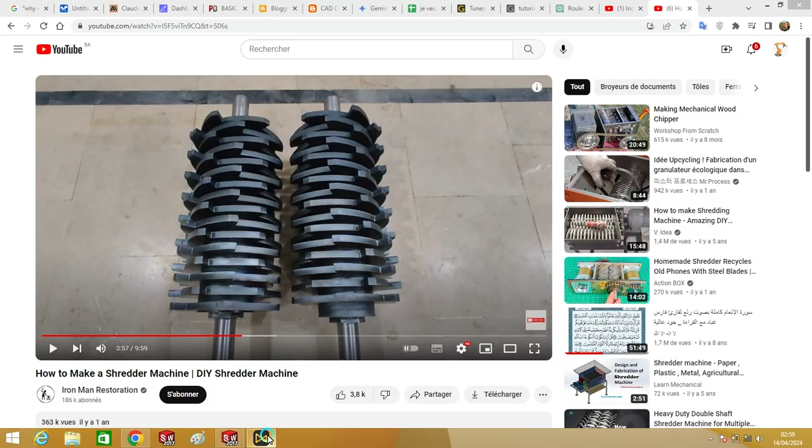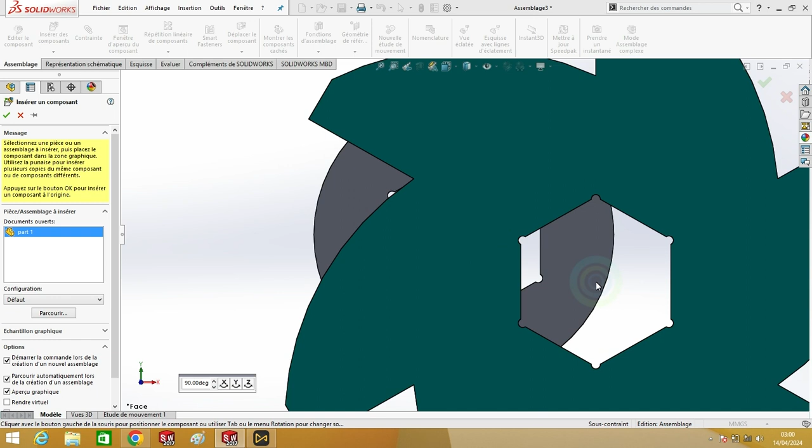Here we open a new assembly. We will take this one. It's the 15 mm spacer. Now we'll take one spacer, one cutter. First relation is contact. Okay. Now here, and here. Okay.

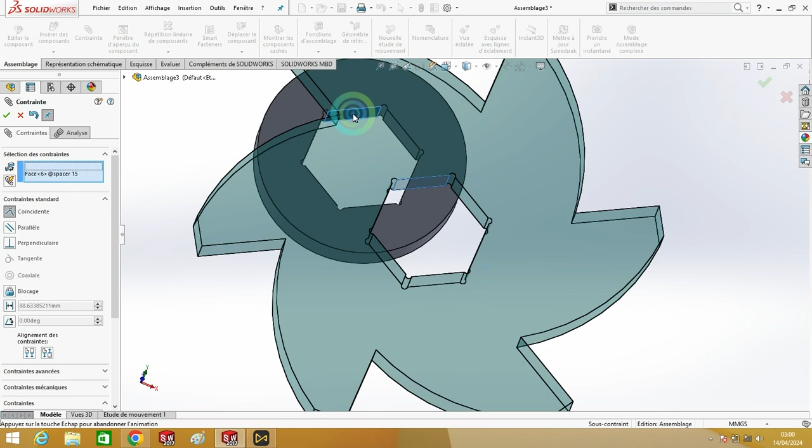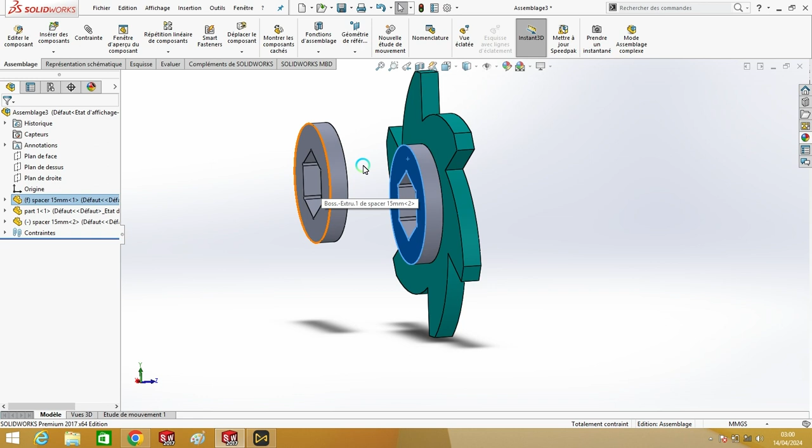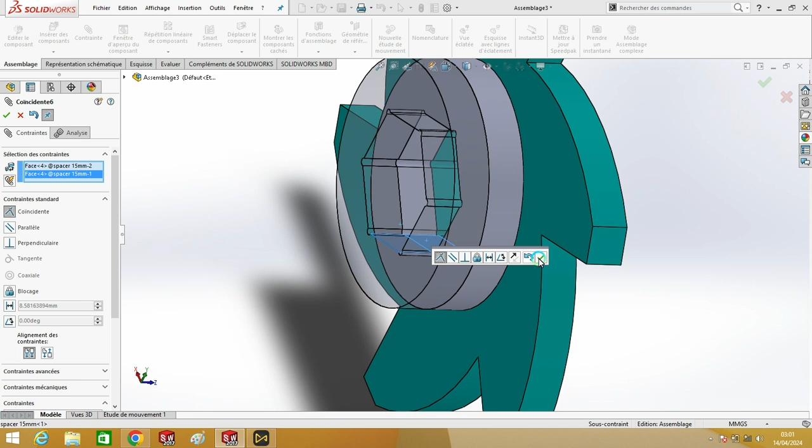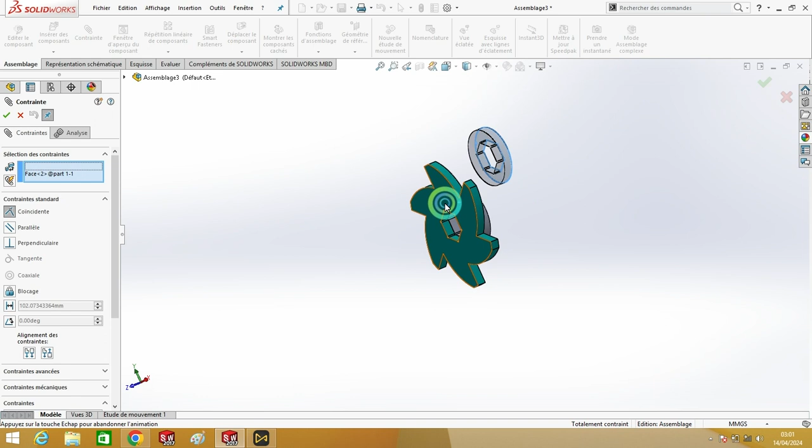No, sorry, we forgot. We'll put another spacer also. So let me make it here. Okay. It's okay now. Now we'll put another spacer. Here. Same as before.

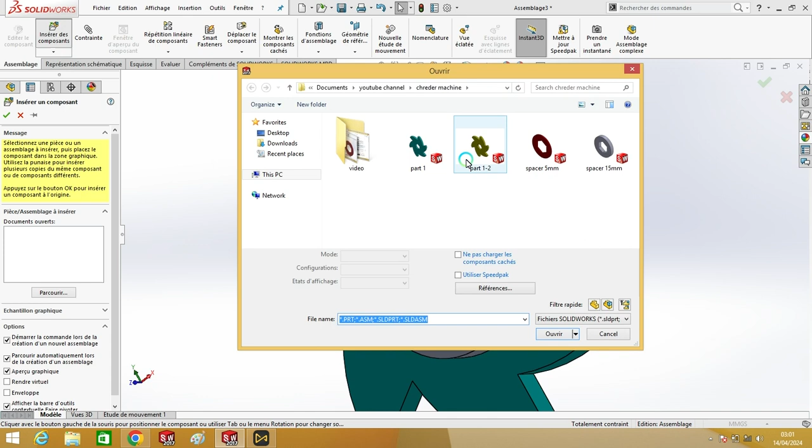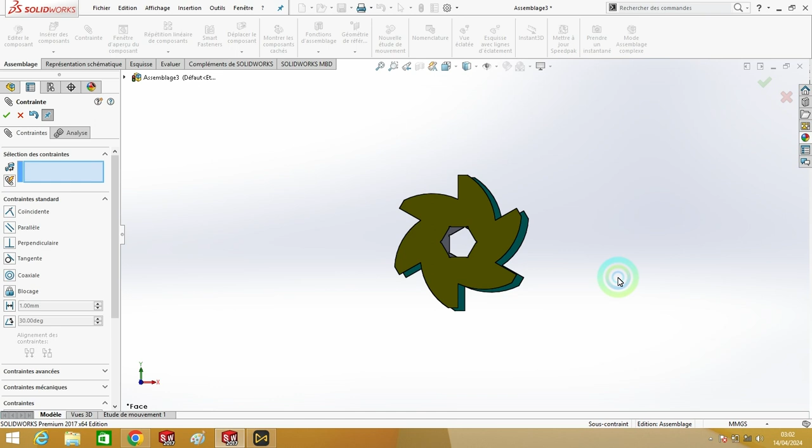So now we will add the other cutter. So first contact, and there. Okay, and also here. Now as you can see, this is the target. Okay.

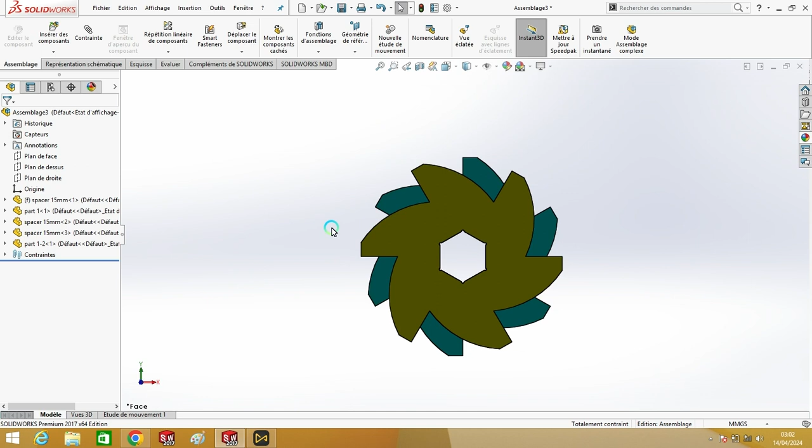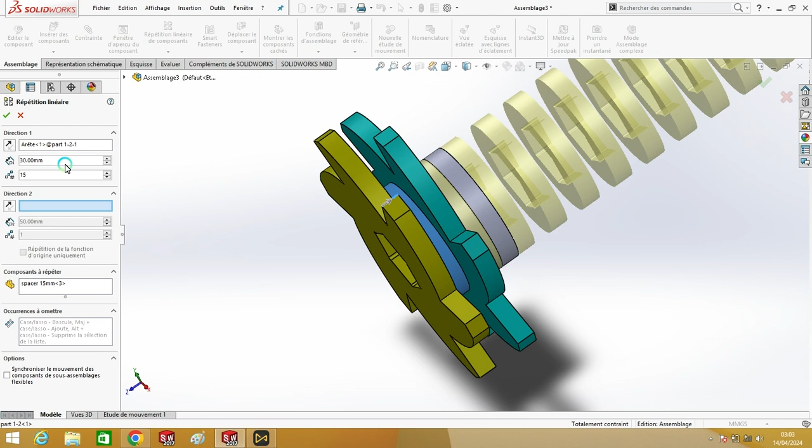Now what we will do, we will do a repetition, a linear repetition. Okay, the part, this one, direction, any direction to be like that, reverse. Here we'll check: every one cutter, between two cutters there is one spacer, so this is the logic like that.

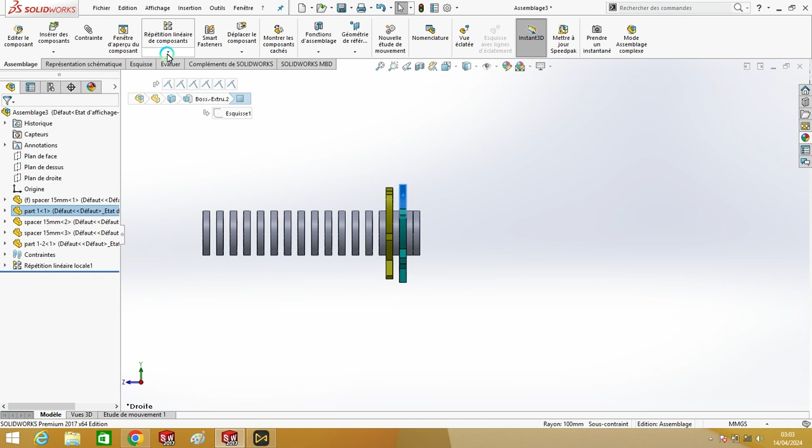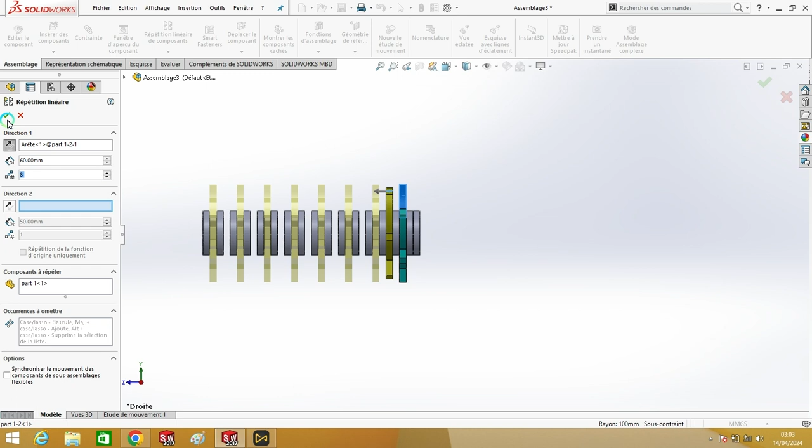We will also repeat this part, direction, same, the spacing is not the same, it will be 60, and it will be a total of 8 pieces. Same for this one. Direction, this direction, reverse, and it's 8 pieces like that.

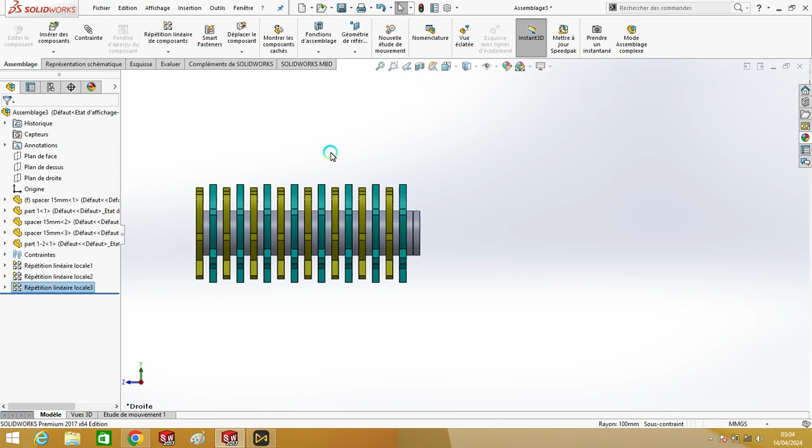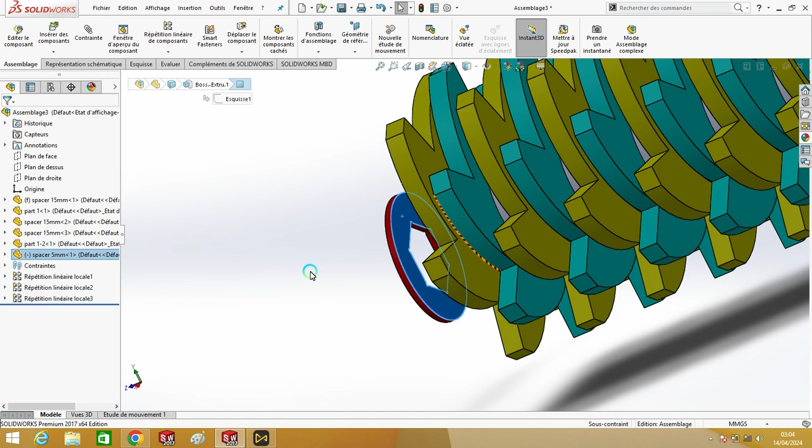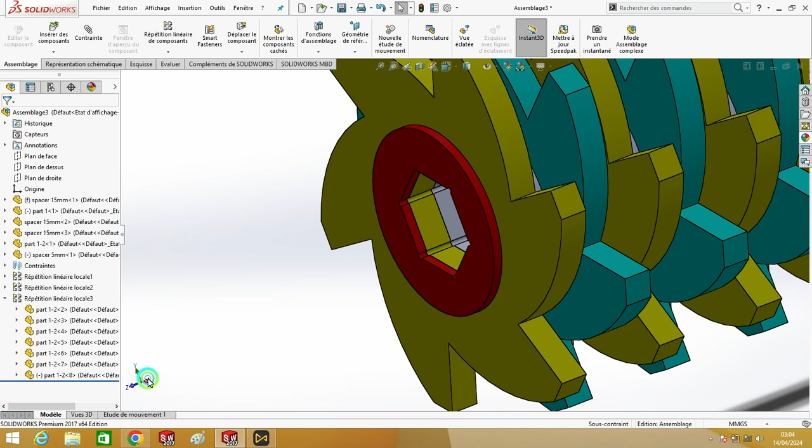As you can see, this is the first shaft. We will add now the 5 mm, and okay, it's finished. As you can see, this is the first shaft.

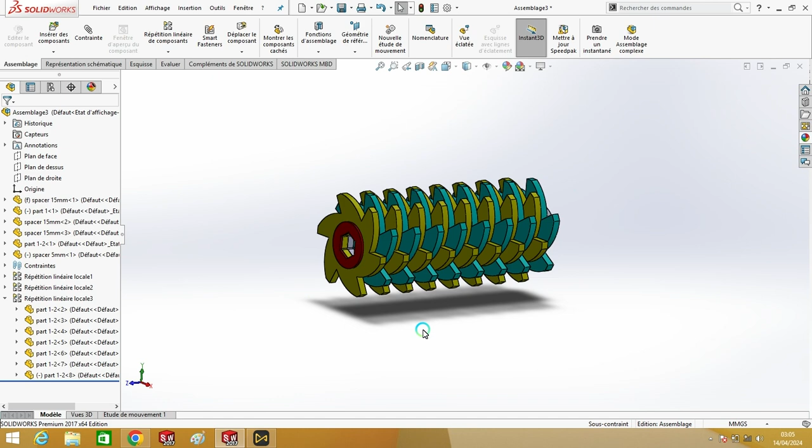Why didn't we start with the shaft? Because whoever made the machine didn't mention any dimension of the shaft. So we will complete this shaft, this assembly, and after that we can see how much the length of the shaft is. This is all for the first shaft. So we will save it as first shaft. Okay.